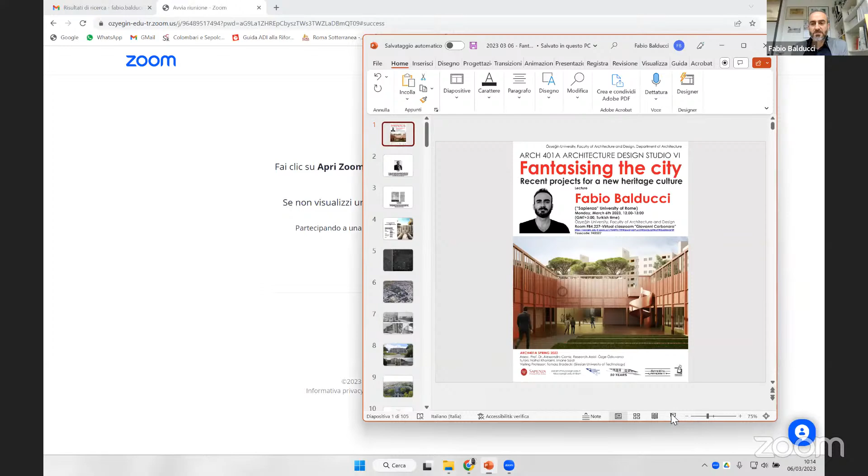Okay, thank you, everyone. Can you hear me? Yes, we can, and see me? Okay, hello everyone, I'm trying to share my screen. Okay, can you see it? Yes, we can. I don't remember how to shrink this panel. Guys, do you know how to shrink this panel? Can you share only the file you want to show us instead of the entire screen? Okay, let me check. Is it okay? Yes, yes. Can you see when I change the slides? Yes, we can. Okay, but still, you don't see the bar, okay? Really? No, we don't see that. We see only the presentation. Okay, so it works for me.

Good morning, everyone, and thank you to Professor Camiz, Özge, and all of the assistants and tutors for the invitation to deliver this lecture in his course.

This lecture will focus on the theme of the reinvention of the city, presenting some projects I have been involved in recent years, using these examples as an instrumental way to show the approach of the school of my teacher, Professor Orazio Carpenzano, who is now Dean of the Faculty of Architecture at Sapienza, when we deal with the theme of heritage.

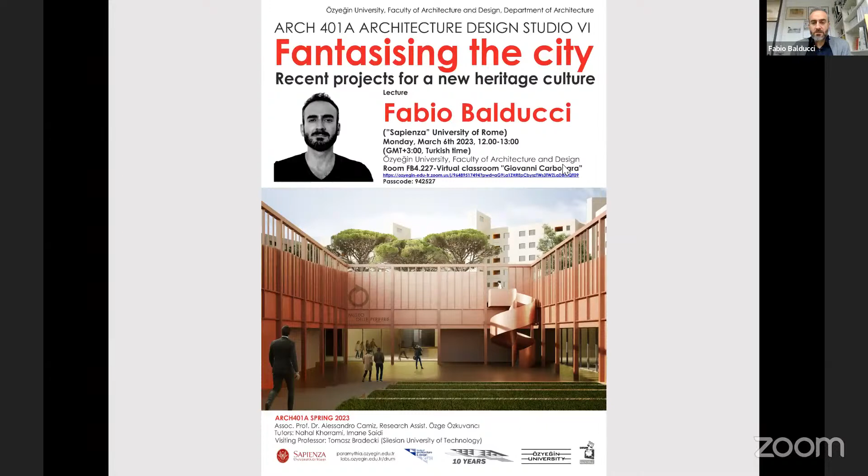I would like to enter this notion of restoration by paying tribute to one of the fathers of modern restoration theory, Professor Giovanni Carbonara, who passed away just over a month ago, to whom this virtual classroom is dedicated. Through a tireless theoretical and practical activity, expressed in a monumental multi-volume treatise on architectural restoration, he contributed to freeing the theory from any imitative temptation of the past, invoking a creativity exercised only through in-depth knowledge of the good to be handed down, favoring a happy contamination between conservation and innovation, referring to the three fundamental values of truth, authenticity, and distinguishability of interventions.

All the projects I will show you today base their logical assumption on these themes, although they are not exclusively restoration projects. In the examples that follow, we always intervene on a material asset, even if these artifacts have different degrees of importance, through architectural interventions that use the language of modernity to approach history and make the pre-existence function better, adapting its uses to contemporary expectations, determining from the juxtaposition of history and the future new figures - fantastic, but at the same time strongly rooted in the place and culture to which they belong.

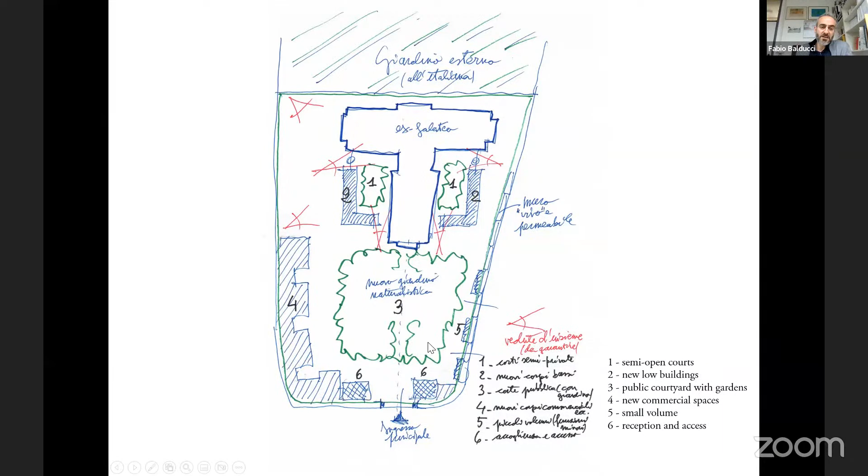The complex fence, partly transformed into a wall inhabited by spaces destined for small commercial facilities, numbers 6, 5, and 4, reinforces the emergence of the urban figure and makes the idea of the context coincide with that of the architectural body.

In the two courtyards that porticos determine on the sides of the building, now occupied by external emergency stairs and other superfetations that will be demolished, a theory of highly ecologically efficient vegetated spaces adorned with shrubs, fruit trees, and mirrors of water for climatic mitigation is planned.

Inside the garden, enclosed by the tree frame, is another open enclosure, the mineral carpet, this one, number 3, of the square in front of the urban front, marking another interior within the existing space.

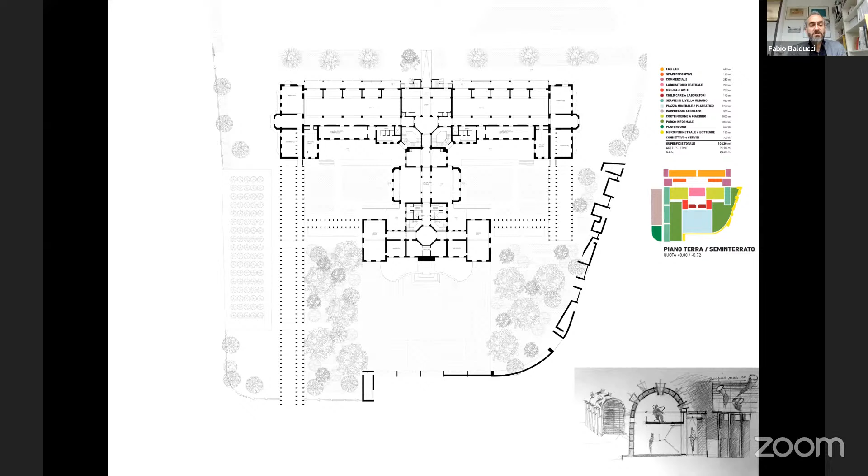The new configuration aims at defining a different balance in the entire territorial system, with explicit effects both on the potential attractiveness for buyers or tenants of the new housing and for the users of the collective spaces.

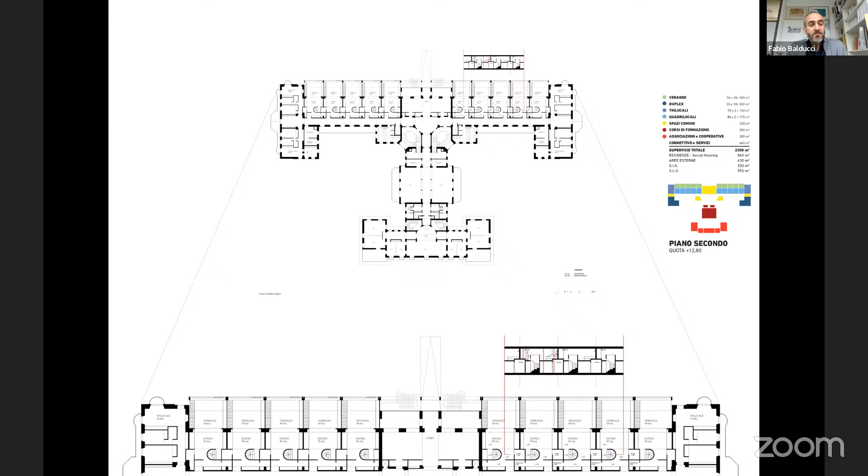In the spaces that complete the residential functions, areas dedicated to public and collective activities are inserted - welcoming and flexible spaces for socializing, where art workshops, readings, and co-working spaces can be located. These can also be further defined by the activating virtuous processes of participation promoted by the administration, involving citizenship, civic associations, and the third sector.

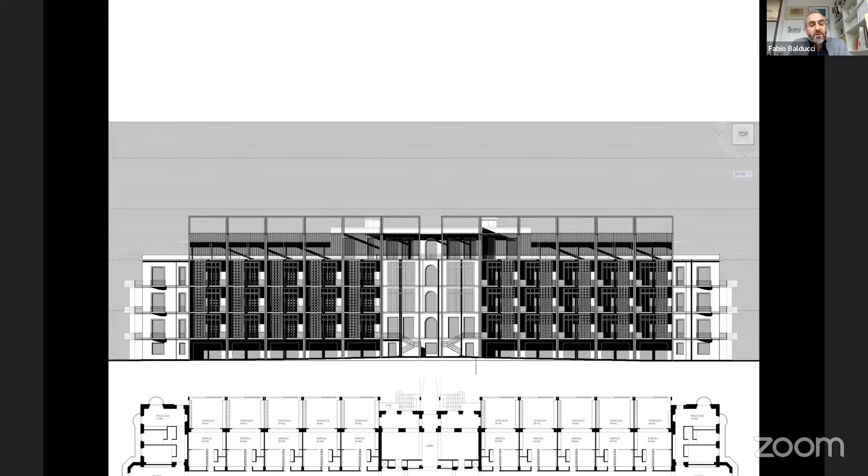This extends the usable surfaces and models three main workings: the trilithic cage, consisting of a system of double vertical uprights joined by horizontal coplanar joints; the horizontal texture of the floors, which dominates the advancement of the vertical structure in the background; and the texture of the facades set back from the verandas, marked by an accelerated scansion of the jalousie screens interposed between the trilithon and the facade. The trilithic system thus becomes the ordering element, almost a pentagram, in which the restored figure of the original building is inscribed.

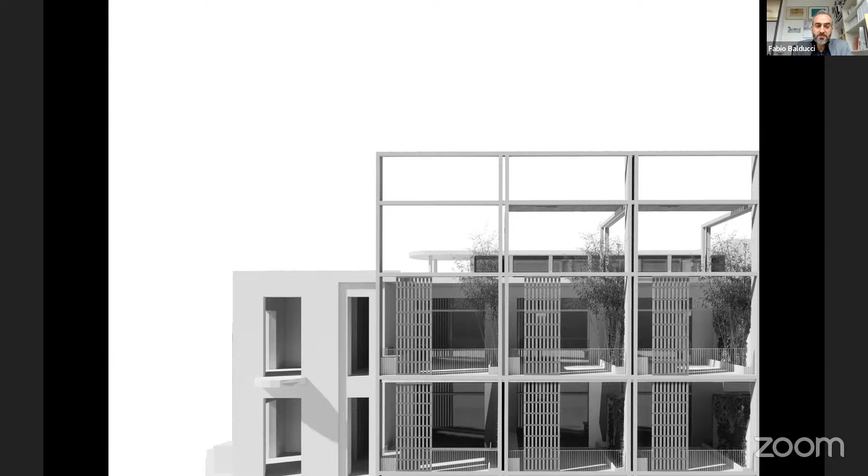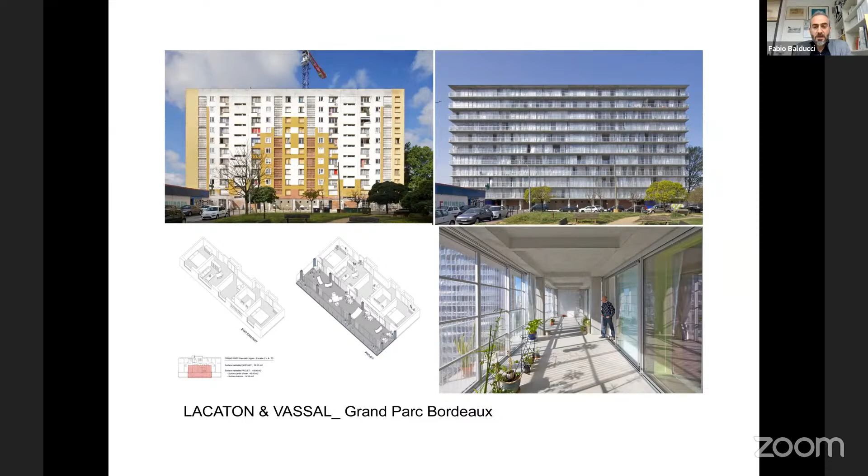So the project here relates to the modern and contemporary tradition, both in the theory of the regeneration of building fronts, as in the famous project for Bordeaux by Lacaton and Vassal, and in the compositional one, which is inscribed in the theme dear to Italian rationalism of the trilithic facade frame.

So from this operation springs the new front, a symbolic combination of the existing and the new - a game of crossfades between the abstract rationalist language and the dynamic force of modernism in its local declination. In this biunivocity, the proposal seeks to achieve a sort of recomposition of the dual condition from which the artifact originates: a fully rationalist modernism that still cohabits with the Beaux-Arts laws of symmetry and its decorative devices.

The new verandas, enlivened by hanging gardens with fruit trees, represent a contemporary declination of the sanatorium solarium - mediating spaces in which to enjoy the benefits of nature in all seasons and climatic conditions.

And this is the second project I want to show you. It is again a competition project in which I participated through the studio I was directing at the time, together with Paolo Marqualdi. It concerns the recovery, restoration, and refunctioning for museum and hospital purposes of the Santa Maria del Popolo complex in Naples.

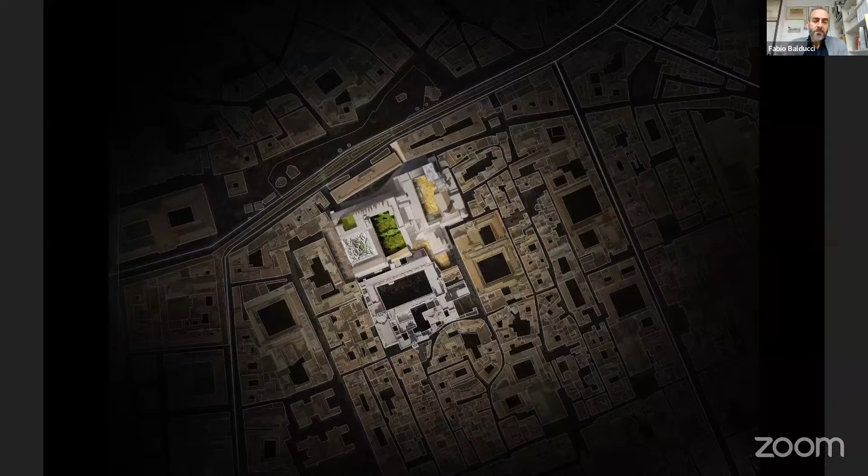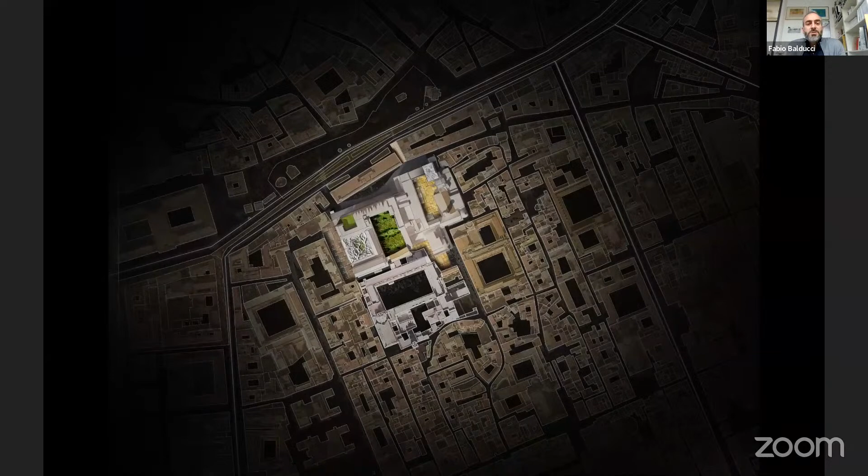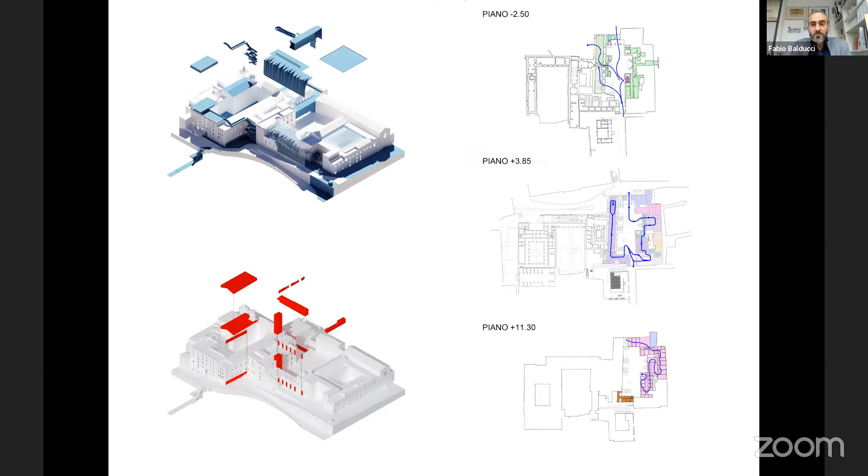From the Baroque conception of space and architectural surfaces mentioned earlier, the project distills the theme of expressive disproportion with a more domestic measure of its component parts. The selected graphs ensure the relations through which the project overrides the relationships between the parts of the complex, and its work with the vast dimension of the city helps identify, making evident, the poetic code of the entire regeneration works. This is a project of mere restoration, but it is very complex.

I must go on with this picture because otherwise it will take so much time to explain.

You just have to know that the project sets the articulated functional program on the generating force of the system of the three internal courtyards that you can see in this picture - the first one, second one, and the third one - which define the intimate and protected relationship between the open spaces and the interior spaces of the building complex.

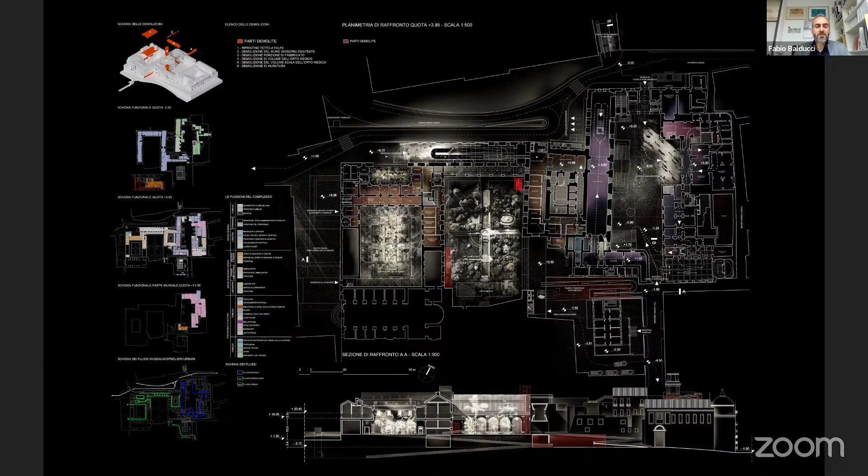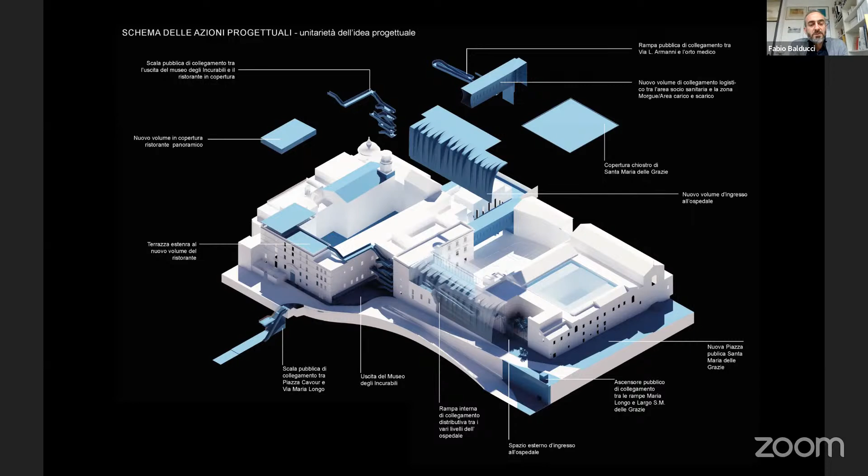So the project will have to express itself by ordering the completions, reintegrations, and additions that have taken place over the centuries. In this constructive dialogue with the existing, the choices that will characterize the material, structural, spatial, and formal aspects of the project will be oriented towards the reintegration of the corrupted or lost image, according to principles and modalities appropriate to the different contexts of which the complex is composed.

As mentioned, the courtyards are re-inhabited and become a place of exchange and relations between different types of users, both long and medium stay patients and museum visitors. The set of planned works aims to reward the environmental quality of the complex, also in relation to its surroundings and the vast dimension of the city.

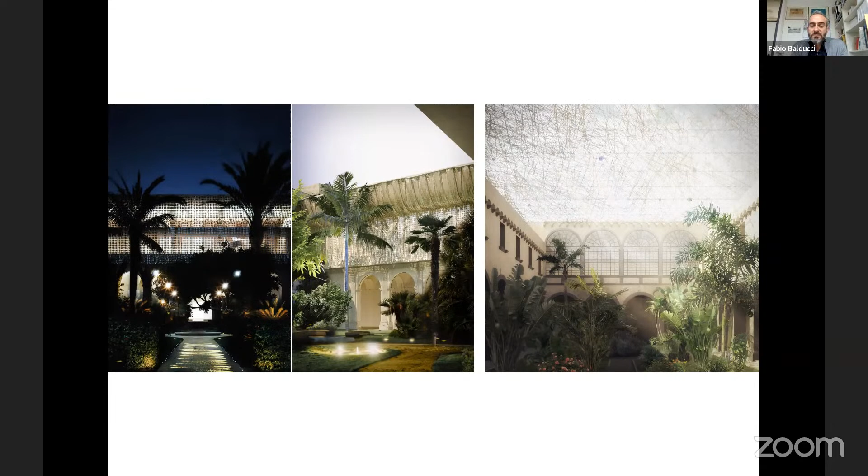Thus, the plan to enrich the vegetation in the open spaces is intended to solicit a permanence that goes beyond its perception as a waiting space or distracted crossing.

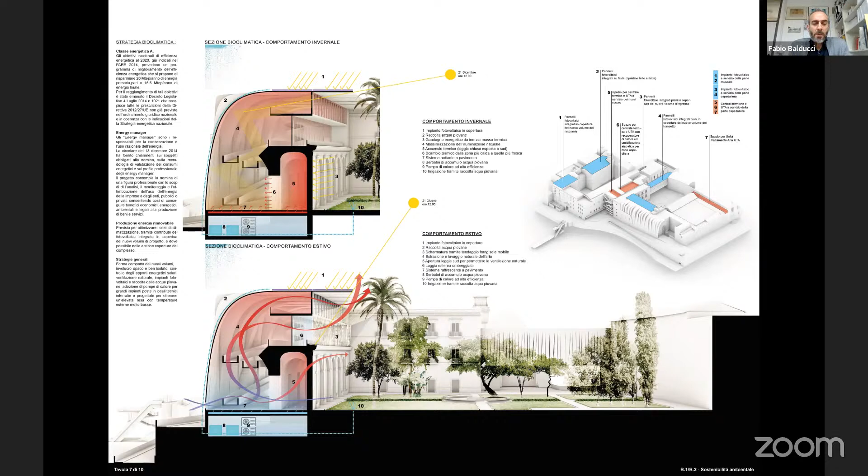For therapeutic functions, the use of the cloister of Santa Maria delle Grazie is proposed alongside the use of the large medical garden, with its courtyard designed by the existing structure and the new volume of this transept. This place, directly accessible from the living quarters, functions as an intermediate space between the city and the complex.

The work on the ruin of the arm collapsed as a result of the bombing of the Second World War and the 1980 earthquake is an opportunity to build a new front scene of the hospital in the urban imagination. The long sleeve of the ruined arm is located in an extraordinary position in relation to the city. The value of this location is emphasized by the upward trajectory of the urban ramp that reaches the access level of the entire complex on the north front.

From here, a great crepidine materializes, sinking its roots into the lowest elevation of the city. In the verticality of the architecture of this great wall face, the objective dimension of the building is completely absent, and instead the unity and coherence of the design between architecture and the city emerges - a unity that results in an unusual and extravagant plastic effect. The building becomes an urban landscape.

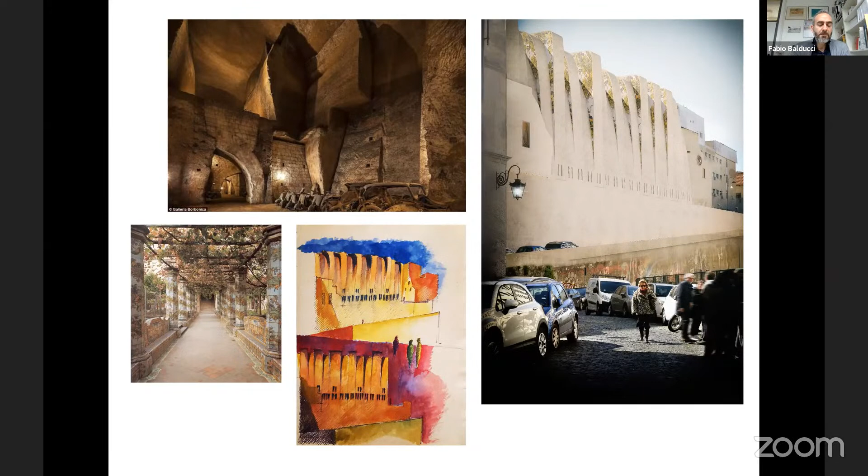This large covered space is dominated on the inside by an architectural promenade running through it in all directions, accompanying the visitor in a panoptic perception of the works of art selected to inhabit the space, based on the theme of the relationship between the care of the body and the care of the soul.

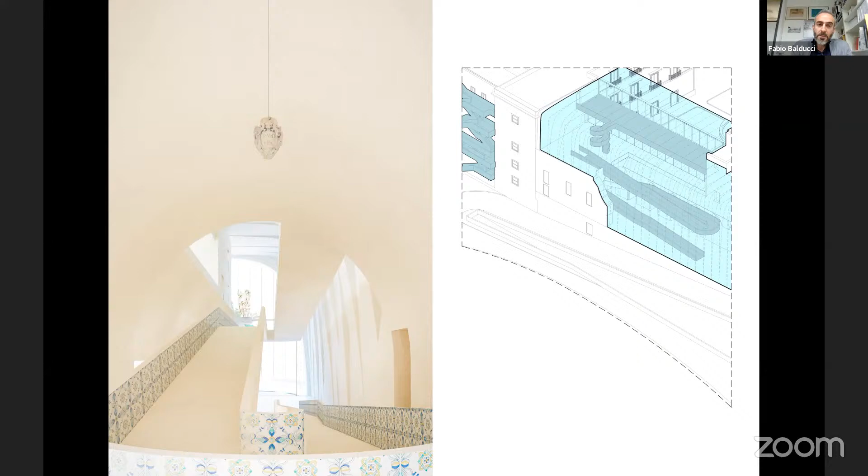So inside this large crepidine, a triple height hall becomes the actual foyer serving the therapy center. In it, all volumetric aspirations are dampened and a large barbaric mass emerges, engraved by scarification of the material and softened by an implicit use of decorative action, which brings about an almost baroque metamorphosis.

The process adopts a compositional principle alien to any functionalist determination and complementary to that which dominates the landscape of the necropolises that inhabit Naples underground - an indefinable space which implies sensitive coverings linked to the climate and the light of the Mediterranean.

So we go through the third project that I want to show you. There are 4 in total, and this is a personal project that I conducted independently as part of the doctoral seminar directed by Orazio Carpenzano, where the theme of heritage is declined in its most immaterial sense, because it's a project intended as a research product of a very specific theme in the great discourse on heritage, but still, I believe, worthy of attention.

That is, how a house inhabited by a great artist can have the opportunity to be transformed into a museum and a place of cultural production, however modest the building itself may be. In this case study, I refer to the project for the transformation of the house of the poet Valentino Zeichen into a house of poetry, which Rome does not have to date.

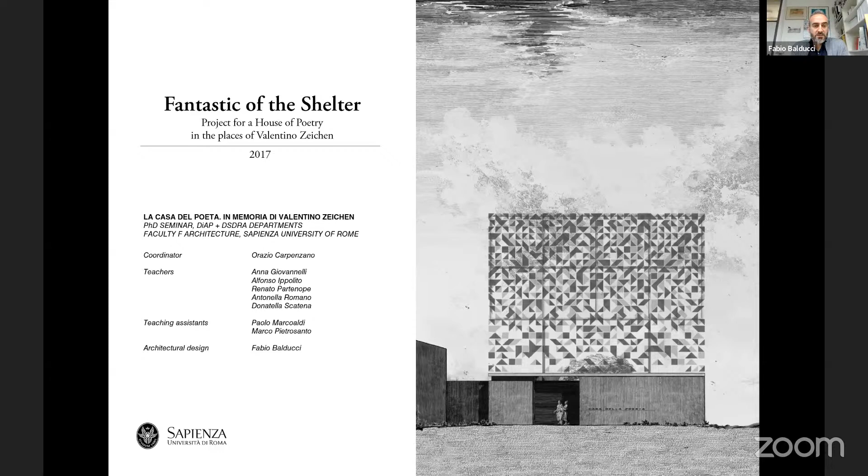Nomadic by genetic inheritance but sedentary de facto, Zeichen was born in Rijeka, the city then known as Fiume, in 1938. But following the exodus of the Istrian people, he moved with his mother Evelina and his father, a gardener, first to Parma, then to Rome, where he lived in perfect balance between these two apparently opposite conditions of precariousness and permanence, from his youth until his death in July 2016.

Now recognized as one of the greatest Italian poets of the 20th century, defined by Alberto Moravia as a contemporary Martial, Zeichen lived for the most part of his life in a house intended as a prosthesis of itself, inhabited by books and very few objects of daily use, totally turned inside out and stripped of every superfluous element, in which the poet, as in Thoreau's famous aphorism, defines his richness in proportion to the number of things he can afford to let alone. These last words today, I bet they resonate with renewed value.

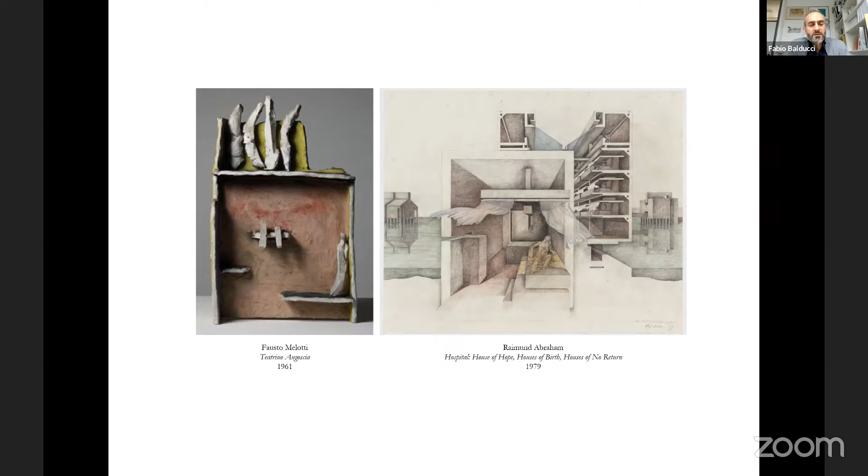The pandemic that has swept the world has exacerbated the condition of contemporary living in a time suspended in the perfect dichotomy between hyperconnectedness and self-isolation. The house as a shelter is transformed into a place of stay rather than a place to return to, an enclosure that hybridizes the place of life and that of work, a syncretic element of accumulation of objects and tools of affection.

As for John Soane's house in London, our homes can be intended as places of stratification of rituals, objects, and artworks. The house can be considered as a multi-temporal space in which affects coexist as the first step of our sociality. In a game of references and reminders, the house welcomes figures from the past, even belonging to different imaginaries, which compose a kind of archive of memory that can be reinterpreted through the imagination, as in the engravings of Giovan Battista Piranesi.

The theme of the house as a refuge thus highlights the dichotomous relationship between domestic and public space, observed from the place of isolation. The image that the world gives us back is filtered by the means that our altered perception allows us. This image, losing all relationship with matter, sublimates into a horizon in which the senses and progressive time give way to the imagination and the memory of cyclical time.

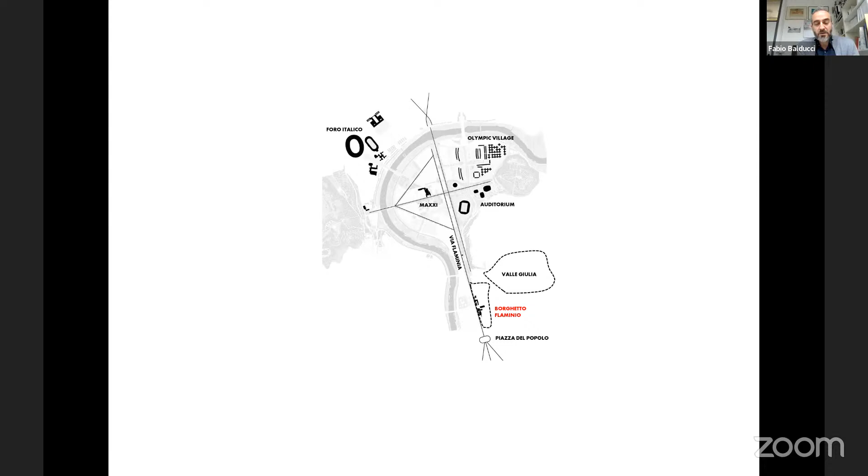The house is in fact located in Borghetto Flaminio, one of the mythical places in Rome, which rises a few meters from Piazza del Popolo within an urban fabric made of illegal small building settlements, still surviving the advent of the compact city of the 20th century, consisting of small industrial artifacts now in disuse and partially under reconversion by our own faculty into spaces for teaching and researching.

This area is dominated by the slopes of the cliff of the Valle Giulia, which still today retains those primitive characteristics of the Etruscan Roman landscape that so much fascinated Goethe and Stendhal. Here, the huge strength of the large masses of tuff carved by the waters govern the morphology of a territory made up of sudden and dramatic changes in altitude.

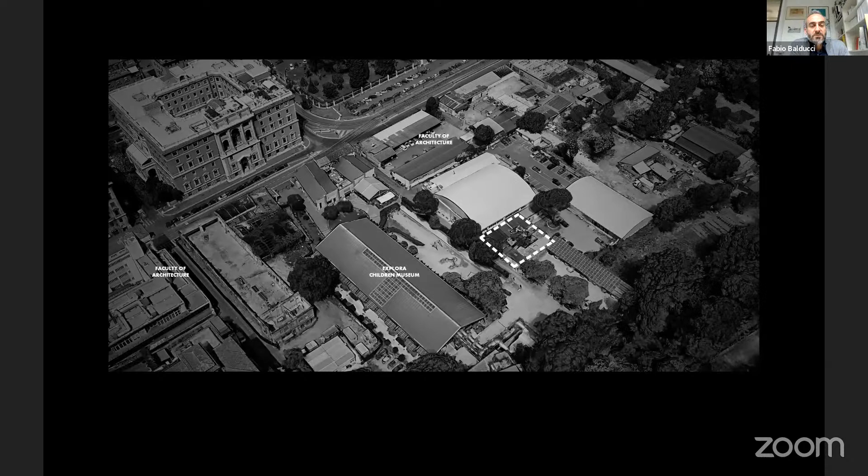The house shack is a single-story rectangular volume of extremely small dimensions, about 5 by 15 meters, an arm of a settlement system that can be defined as a collective courtyard. In fact, the house is part of a square 16 meters on each side, organized around an open space overlooked by 2 houses.

The house, like many in this place, arose spontaneously and was occupied by Zeichen towards the end of the 60s, in analogy to the reappropriation practices widespread among the artists of the Roman cultural milieu, of which Zeichen was actively part.

Valerio Magrelli's definition of casa baracca, house shack, appears to be the most consistent to describe this object. The building, although based on the archetype of the court house, is characterized by a certain constructive fragility. The temporary nature of its constructive elements suggests a makeshift shelter, a refuge that must fulfill its essential function, while the city becomes the true social and cultural home of the poet.

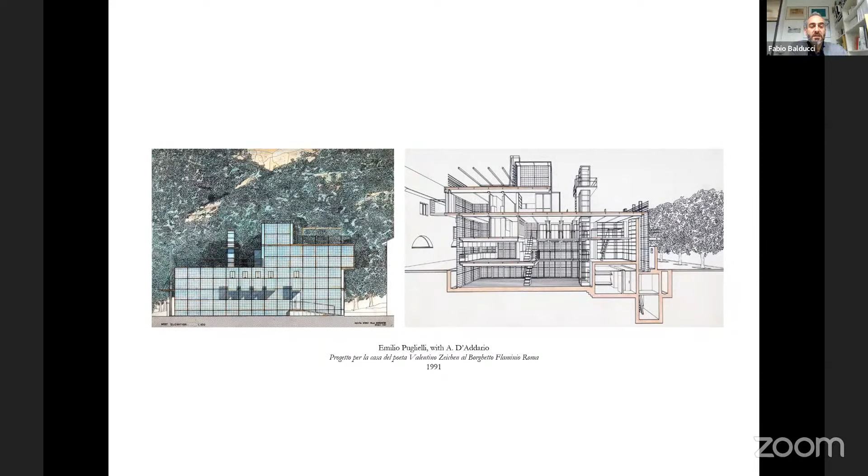The inevitable term of comparison of the seminar was the complete renovation project of the Zeichen House, developed by Emilio Puglielli and presented at the Venice Biennale in 1991. An ideal home for a Dadaist client, developed up to the executive scale and clearly inspired by Pierre Chareau's Maison de Verre.

The final project of the PhD seminar, as stated by Paolo Marcoaldi, shows design strategies that are heterogeneous in form and function. Some consider the house as a ruin. The pre-existence is reduced to the archaeology of the built, simulacrum of a metaphysical space, an object suspended between the dreamlike dimension, reverie of impossible times and spaces.

The house, frozen in its precarious condition, can become an expedient for possible overwritings, or a sort of planned catastrophe, in which the dwelling loses its cover and the enclosure becomes a Dadaist ready-made.

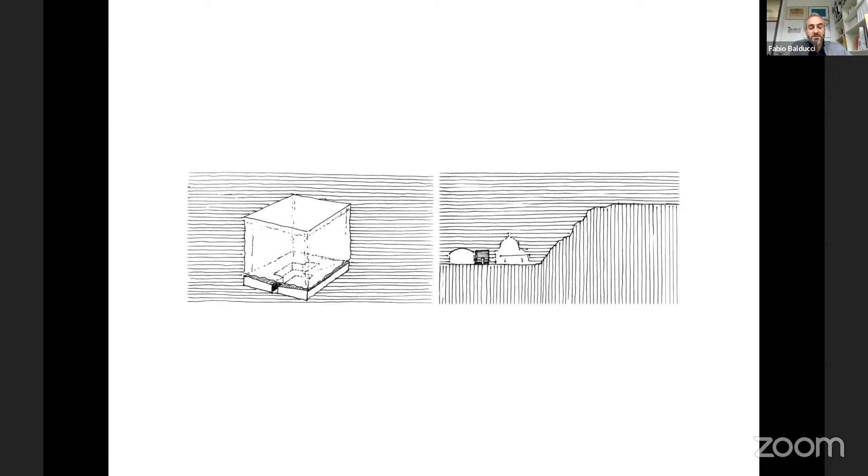My project for the House of Poetry moves from the intention to define the space of imagination through an indefinite and labile boundary. A stereometric structure defines a perfectly cubical space that is rarefied air, as Zeichen said.

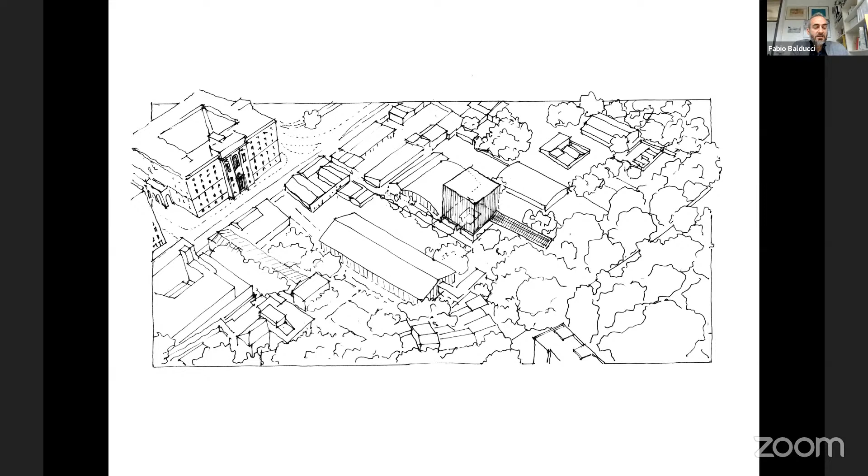This ephemeral elevation of the house rewrites its destiny and role in the Borghetto landscape, restoring a measure in height that defines a figure both peremptory and elusive, able to compete with the scale of the surrounding urban, anthropic, and natural landscape.

The result is an implicit homage to a glorious, albeit small, work of a great Roman architect: the Agip service station in Mestre by Costantino Dardi, which, having lost the acrylic sheets that covered it, today shows the elegant and diaphanous texture of the spatial grid of its own structure, making it look like an empty aviary capable only of occupying a portion of space—a rarefied air, as the poet called it.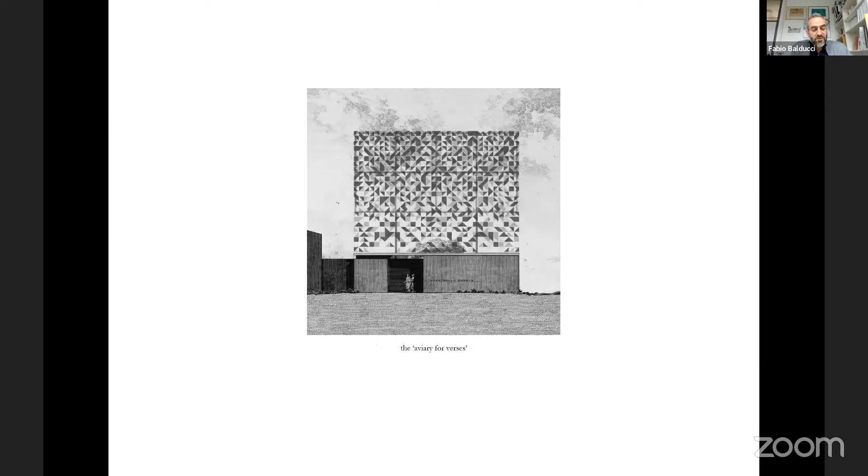In this inventive operation, where memory once again plays a fundamental role as imaginative trigger, and by adopting a purely experimental method which sees the project as the natural outcome of theoretical and critical research applied to architecture, the proposal works by subtraction and addition on the now inert matter of the house without any owner.

This aviary for verses embodies and stages the isolation and the desire for sharing that every artistic operation expresses and yearns for, where the paper seems to take on a life of its own, as if by an immanent act attending a poetic will, releasing the pages of Zeichen's dream book into the rarefied space of his imprint.

In the definition of the figure, the clear geometry of the square is corrupted and contrasted by the myriad of diagonals generated by triangular submodels, according to methods of regular decomposition of space that, from the Roman floors in Opus Sectile, run through the history of the figurative arts and through Anni Albers, reaching us.

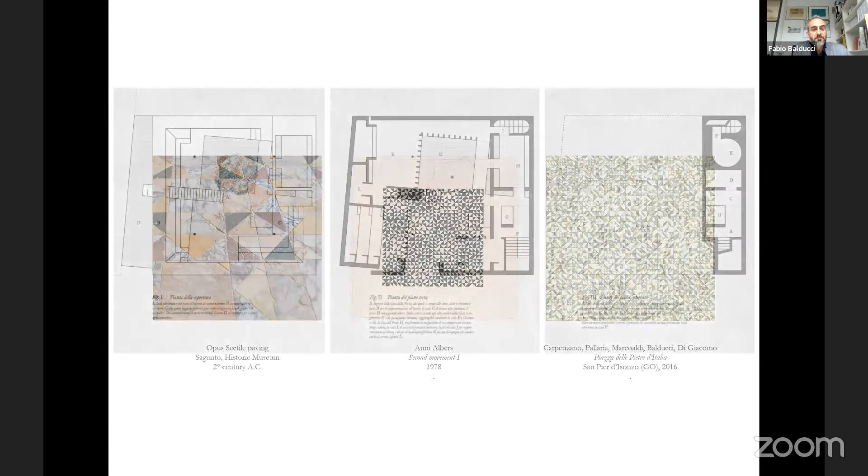In the house, different types of encounter with poetry are allowed. In the central court, carved under the big tree, one can gather in groups to listen to readings aloud. On the cover of the low volume, you can lie down or sit to read alone, in pairs, or in small groups, facing the Piranesian scenery.

Going down a spiral staircase, you arrive in a vaulted hypogeum, a think tank where you can be completely immersed in silence, as in a room of sensory deprivation.

The area of the house shack is transformed into an open-air garden, below which lies a small museum of Valentino Zeichen's works, accessible by stairs and a lift from the reception and ticket office. On the opposite side of the central courtyard, a literary cafeteria, toilets, and a hall for indoor performances complete the equipment of the House of Poetry.

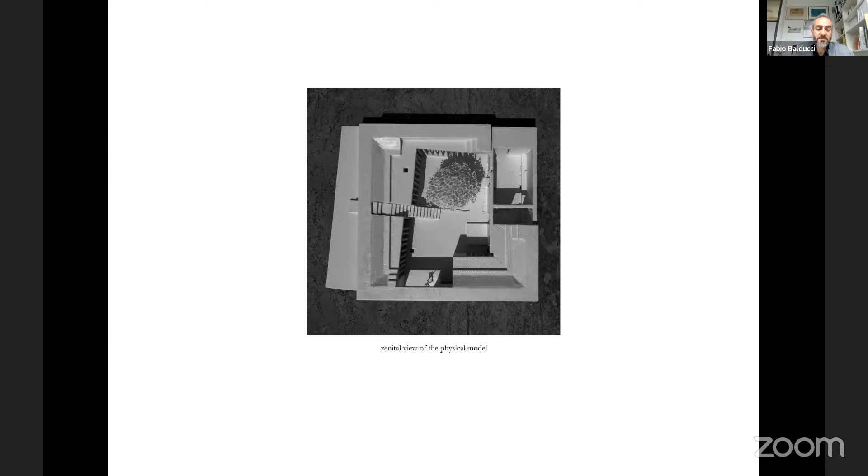The result is an architecture deprived of any tinsel, addition, or artifice, revealing the primitive and timeless dimension of reading and meeting with others.

In a game of references and reminders, the aviary welcomes figures from the past, even belonging to different imaginaries, composing a kind of archive of memory.

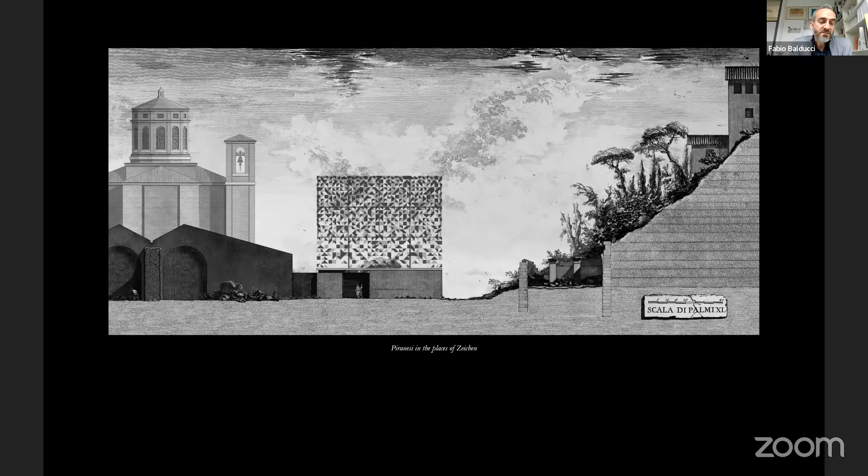The theme of the house museum is hybridized with that of the space for the production and dissemination of art. Poetry becomes the means by which to embrace humanity from the enclosure of one's refuge, and the house shack assumes the role of a Hegelian concrete universal, connecting many oppositional diptychs linked to Rome and its meaning for our civilization: physical and intangible heritage, great history and micro-stories, solemn and popular lexicons, nomadism and permanence, memory and the future.

This last project I want to tell you about concerns a large feasibility study involving Sapienza, again under the direction of Orazio Carpenzano, for the energy, architectural, and functional recovery and regeneration of the large building at Tor Bella Monaca.

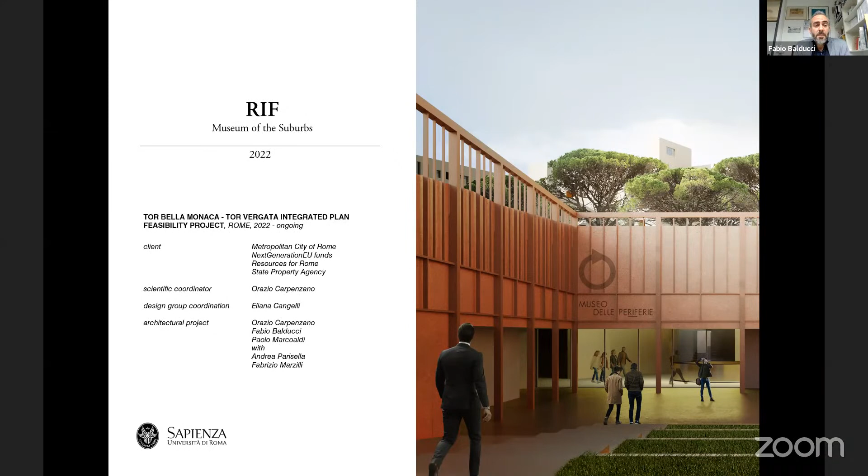The building is located in the eastern outskirts of Rome, just off the Grande Raccordo Anulare, the road infrastructure encompassing the urban layout and connecting the routes of the radial transport system that has linked Rome with the whole of Europe since antiquity.

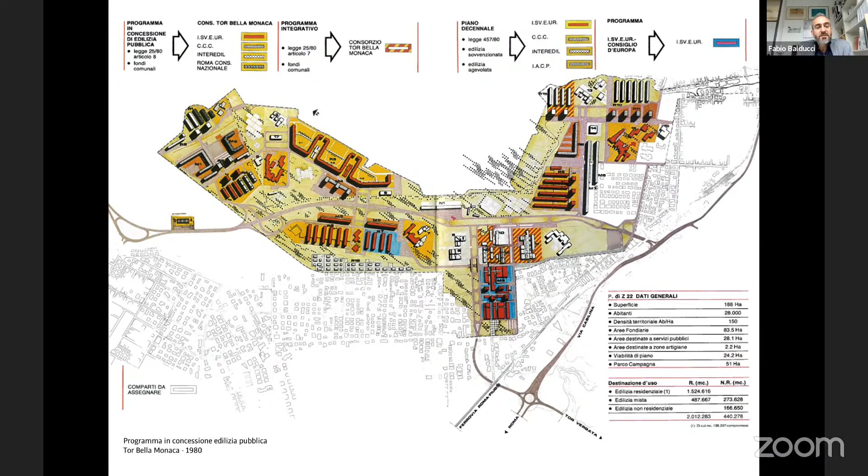The building is part of an ambitious social housing plan implemented in the early 1980s to meet the housing demand of large sections of the Italian population unable to buy a house at market prices.

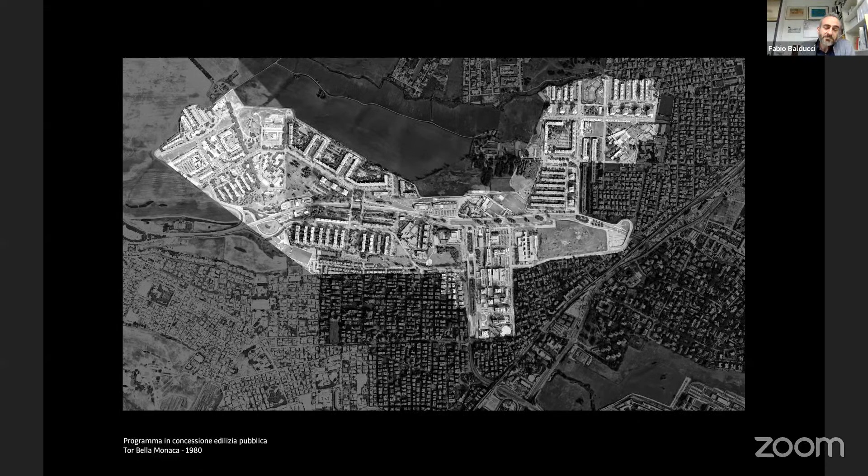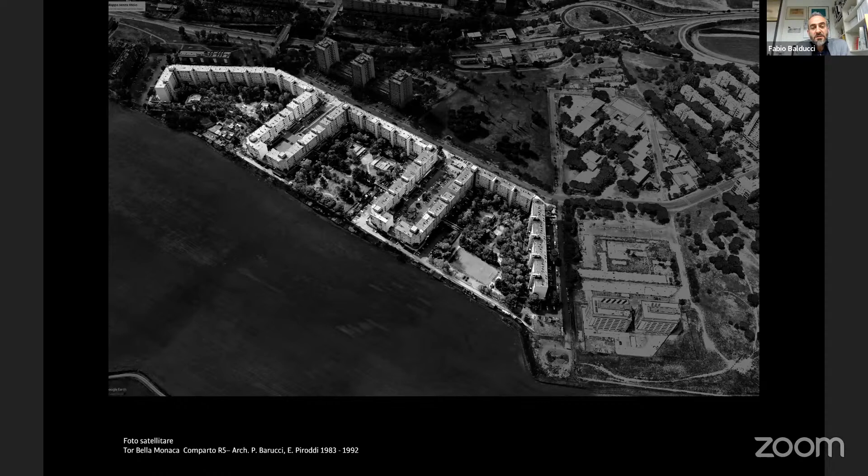This large redent, designed by Pietro Barucci according to the theoretical principles expressed by Le Corbusier, is located in a frontier territory between the city pressing behind it and the Roman countryside, toward which the complex looks out through three large courtyards open to the landscape facing the Alban Hills and the Apennine Mountains.

This large building, designed to accommodate around 5,000 people, bears witness to an ideology that failed when it ran up against the difficulty of making the ground and roof level spaces work as engines of sociality. Today, the complex is a space of severe degradation and is considered the city's largest drug den.

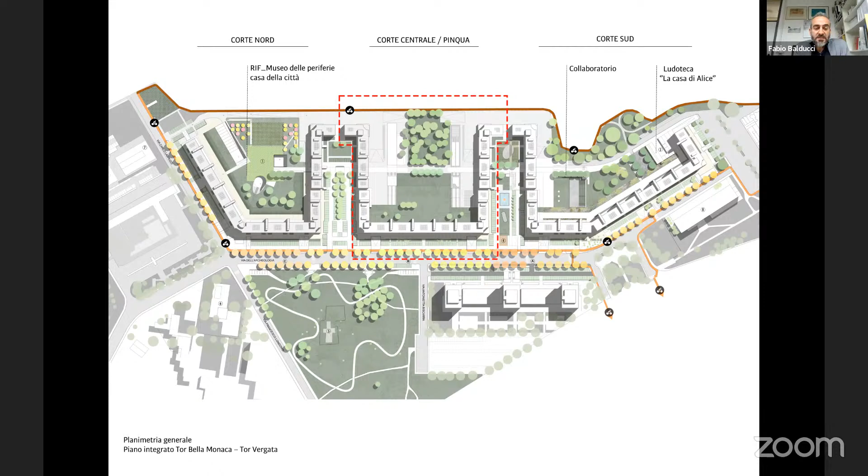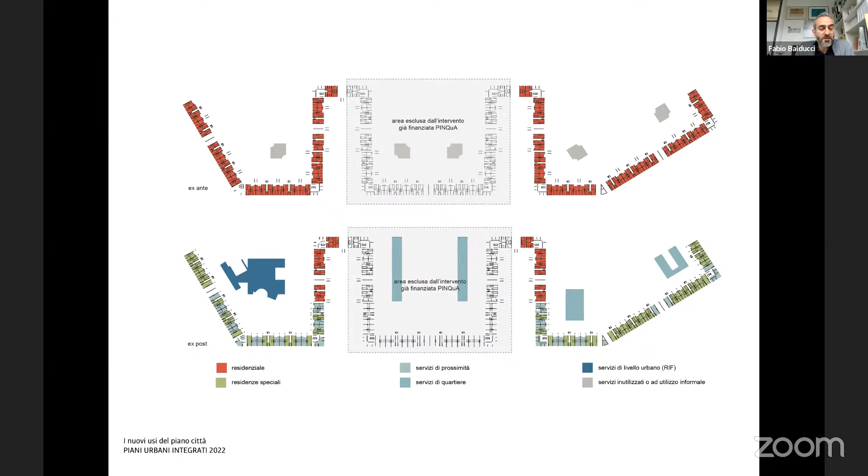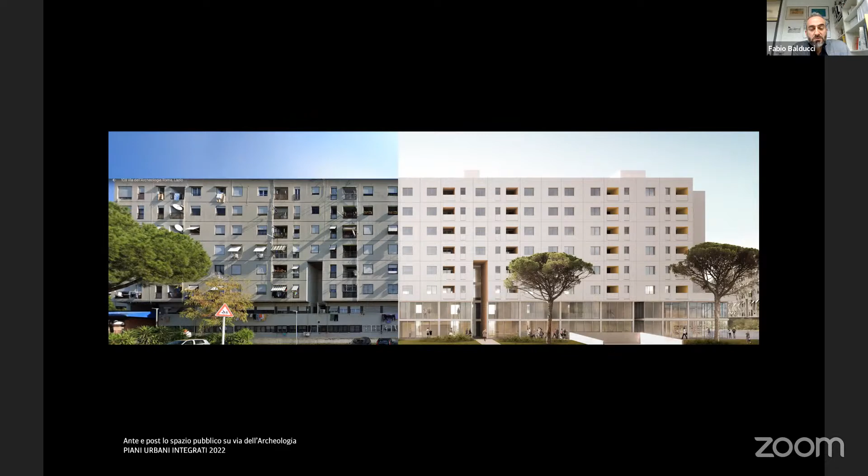The general program prepared by Sapienza's interdisciplinary team aims to set up an ambitious green regeneration project for both the building and the open spaces, encouraging a rebirth of the urban complex's civic sense by intervening first on the ground floor through a typological work of inversion and parcellizing of the accesses of the dwellings, bringing together architecture and landscape to redefine the relationships between the building body, its front on the main road, and those on the three large courtyards open towards the landscape.

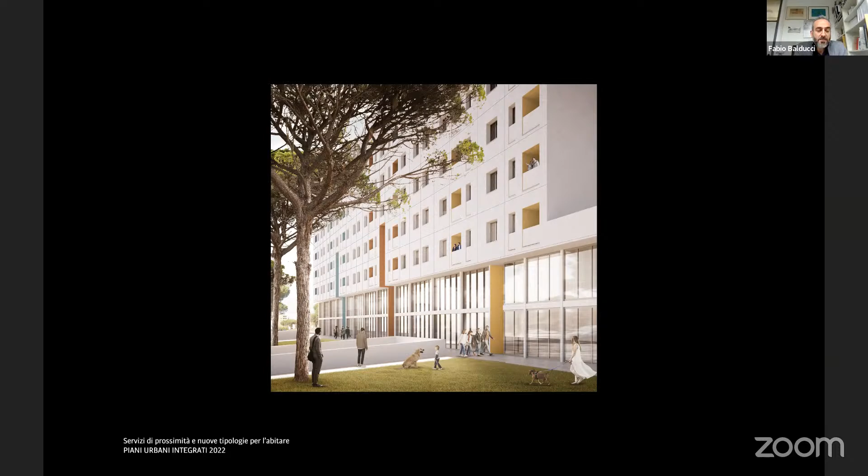These correctives stem from a reconsideration of the building's ground floor with a view to constructing a new sort of intervisibility between inside and outside, between the front of Via dell'Archeologia and the Agro Romano, trying to make the basement completely transparent and intercepting within it sensitive points through which to define the accesses and make them become passages capable of reuniting the public space of the street with the protected space of the courtyards.

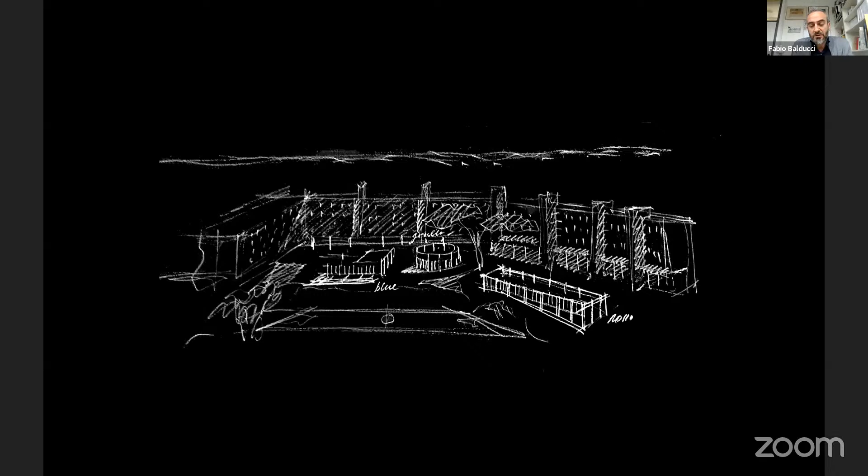The morphological order of the north courtyard is rewritten by a ground plan that predisposes the open space to a greater interaction with the city and the neighborhood, recognizing its potential role as a strategic fulcrum for urban regeneration, where the demands for sociality and sharing are reflected in new functions serving the community.

This courtyard houses the headquarters of RIF, the Museo delle Periferie, the Museum of the Suburbs, conceived and directed by Giorgio De Finis. The architectural project places the new building body below the green walkway of the courtyard, which is hollowed by three large patios, each based on a pure geometric figure: the circle, the rectangle, and the square. Stereometric metal frames rivet their perimeters and raise these profiles, transforming them into volumes devoid of matter. The museum spaces become the radical apparatus of the existing residential settlements.

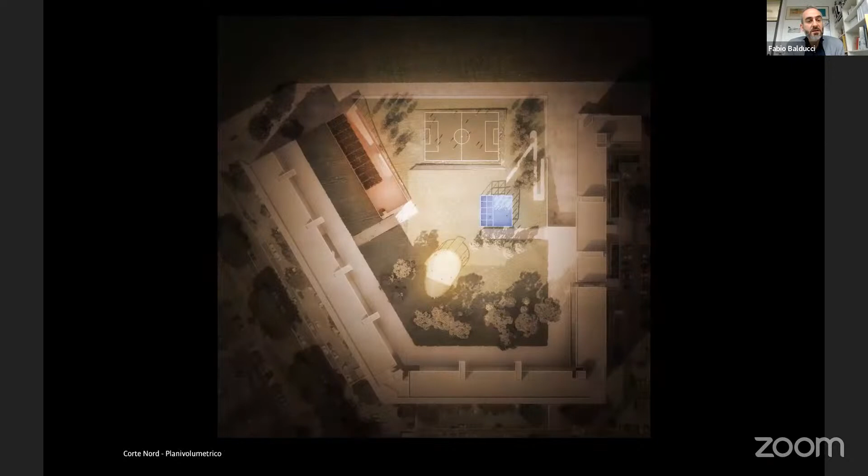The foundations of the large house are intended as a place symbolically dedicated to cooperation. The museum does not interfere with the perspective towards the Roman Ager, the Campagna Romana. It has no development in elevation and seeks out a visual continuity between Via dell'Archeologia and the countryside.

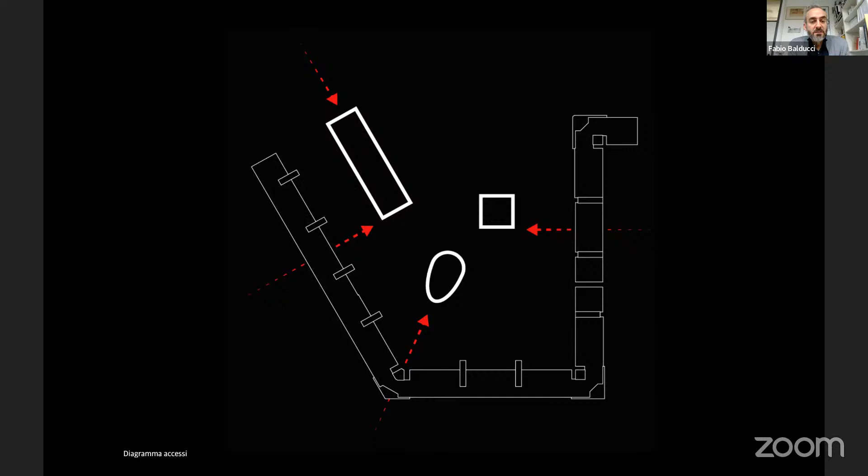This continuity is interrupted exceptionally by a few signs, special frames that, like reticular landmarks, identify the position of three craters that invite us underground. The combination of these three elements on the architectural still life of the green plane functionally measures and defines the open spaces of the courtyard, rebalancing its scalar relationship with the imposing building mass of the R5 building designed by Pietro Barucci, and mediating the transition between the imposing verticality of the architecture and the open horizontality of the landscape of the countryside opening towards the east.

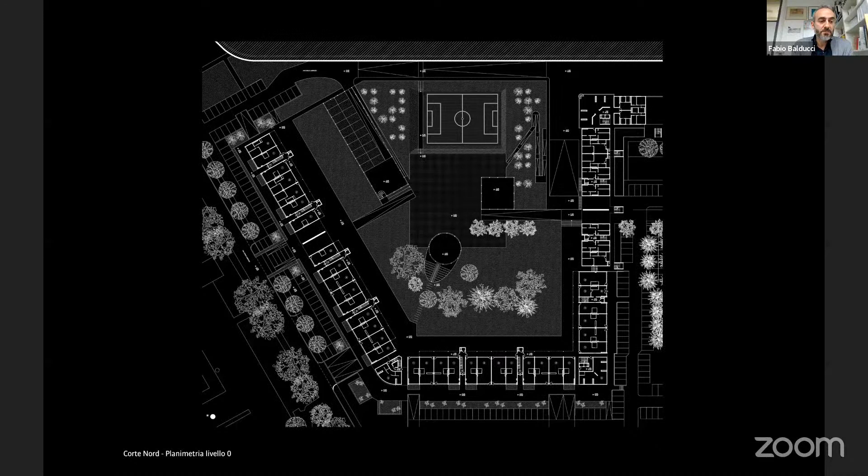The patios, thus configured, become mixed-use sunken gardens, providing multiple accessibility and the necessary lighting to the underlying rooms of the RIF and the Casa della Città.

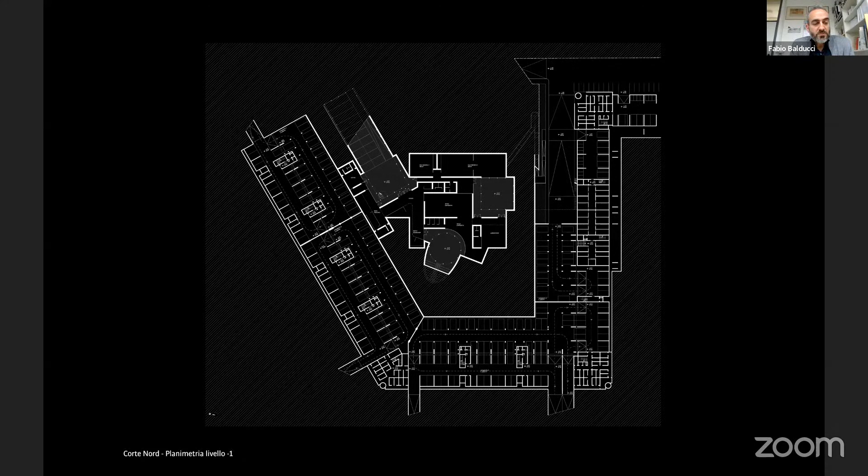In addition to rooms dedicated to the museum exhibition, the museum also houses a cafeteria, a bookshop information point, and workshops that, together with the music rehearsal rooms of the Casa della Città, aim to define the new intervention as a space open to multiple creativity, recognizing the capacity of artistic production to foster social cohesion and offer possible new perspectives to the inhabitants of the neighborhood and the city.

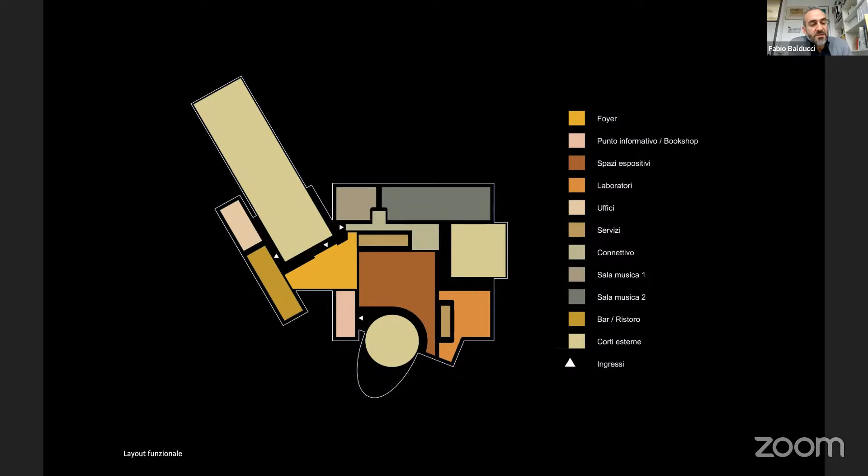The project recognizes in the periphery the habitat for the emergence of a new idea of culture: inclusive, collaborative, dialogic, open to the future, thanks to that vitalistic charge that has always characterized frontier spaces.

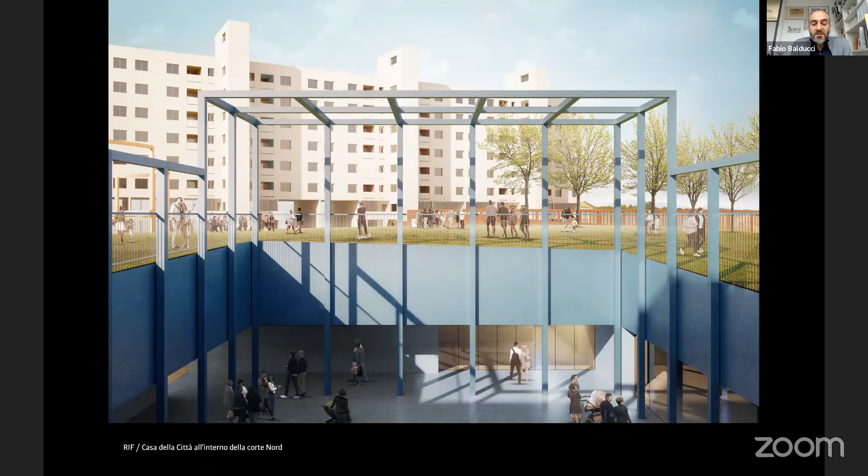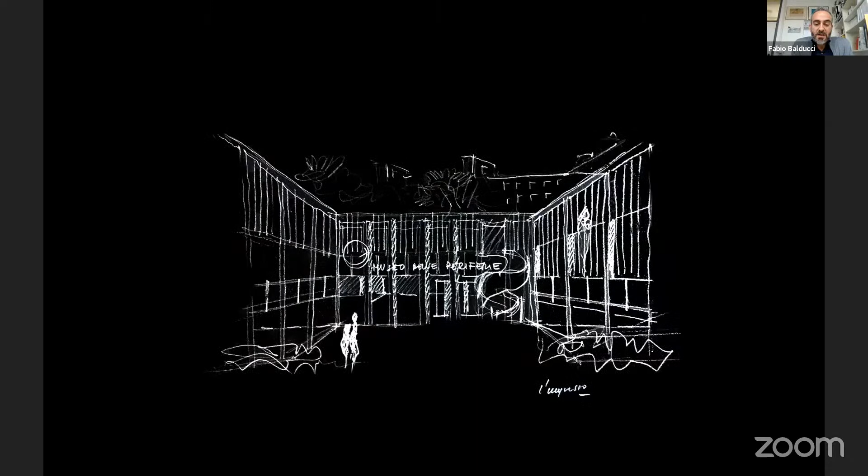The RIF is the first museum beyond Rome's Grande Raccordo Anulare, and for this reason it also acquires a symbolic significance of great interest. It is an experiment that aspires to be a reference point for the entire city, proposing itself as an exportable enzymatic body, finding the possibility not so much of reproducing the exact same model, but starting from that enzyme and managing to diversify with respect to different contexts, immersing itself in a specific reality such as that of Tor Bella Monaca.

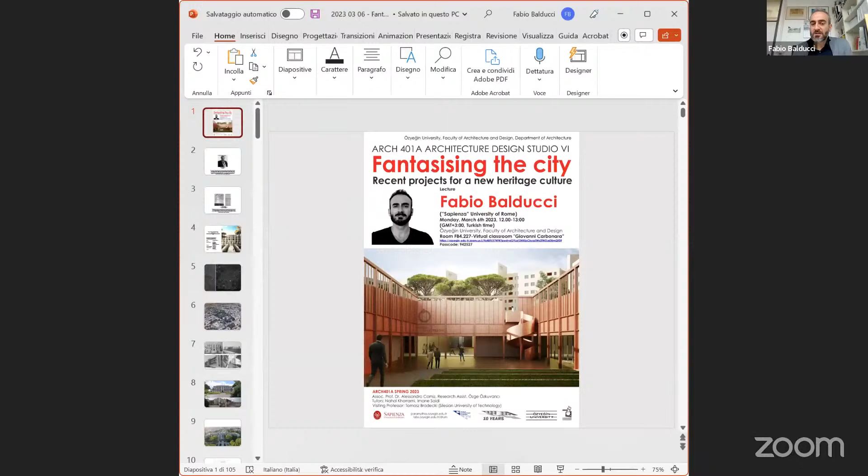Because I think through this project I tried to show you how heritage is a complex matter and works on different levels, both on monuments, but also on immaterial modern monuments, also modern monsters, such as the Tor Bella Monaca one, but also on the immaterial level of this transfer of culture, memories, knowledge, and ideas from one generation to another.

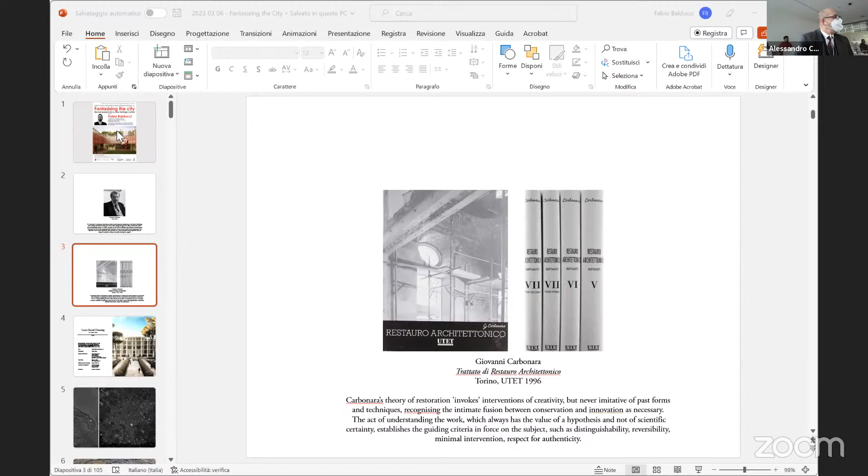Before we open the floor for discussion and questions, I would like to specifically thank you for remembering Giovanni Carbonara, who he was, and how he is important for us. That is the reason why we have dedicated our virtual classroom to him, not only today, but throughout the semester. Since the pandemic, when we went online, every year we're dedicating a classroom to somebody.

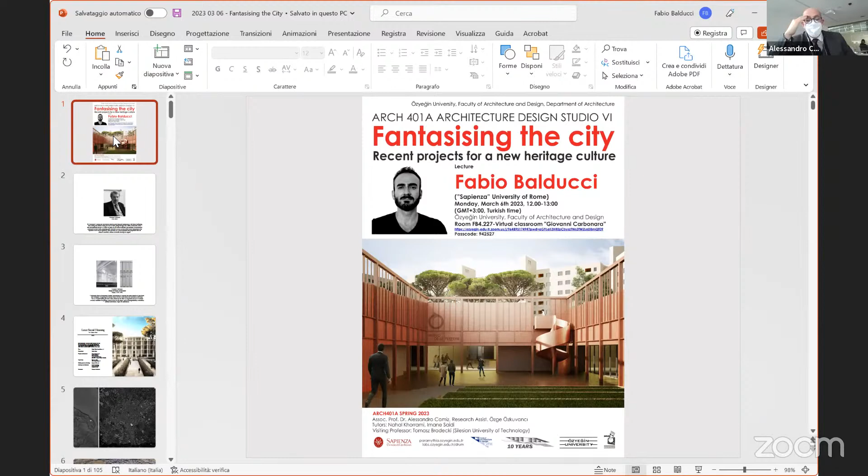We had Caniggia, we had Sedad Eldem, we had Boni, every year we're picking somebody important. And so this semester we're honoring the memory of Giovanni Carbonara, who was one of my professors and also a very close friend, I should say.

And then I would just want to say three words about the project. These are very different projects, different styles, different contexts, different places, but they have something in common, all of them, in my opinion. And these are keywords: modification, fantasy, and figure. So all these examples we have seen are the modification of something that is already there.

They're not ex abrupto. They're not built on nothing. They're built as a modification of an existing artifact. That's very important. And today, this is what we need to do: we need to recycle existing buildings and transform them rather than building new stuff. So I do appreciate that.

I want to underline this role of fantasy or fantastic, as opposed to logic — well, opposed, as parallel to logic. So logic has its own structure, demonstrating things through axioms. That's the way science is built.